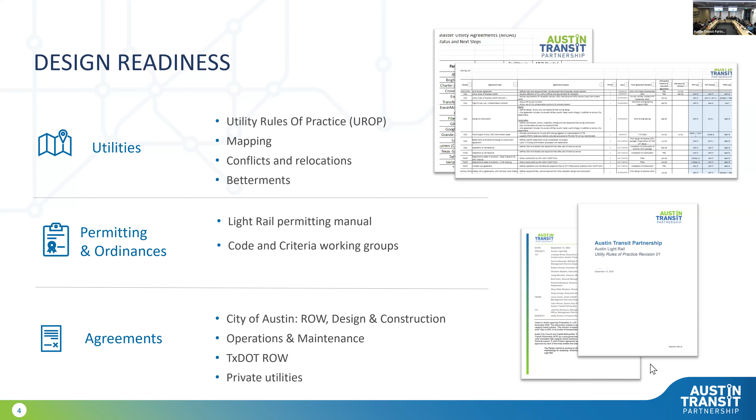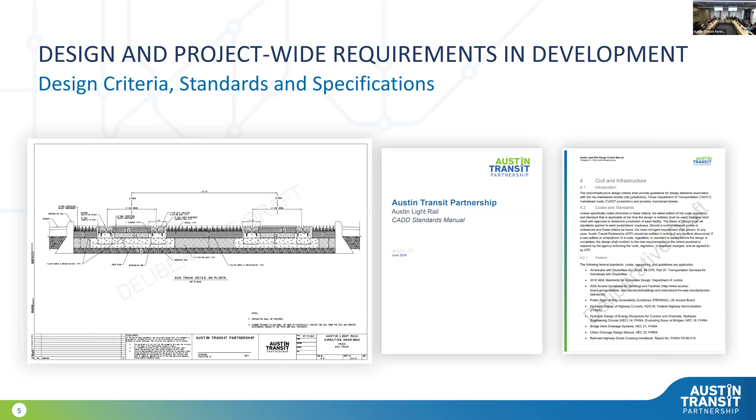Design requirements are an important thing to have in a design project. What they do is help set guardrails for what the design could look like and should look like. We do have various types of requirements in the form of criteria, standards, specifications, and guidelines, with the focus of them being developed as functional requirements so that we still allow innovation from the progressive design builder during final design.

A little more detail on the utility rules of practice. ATP and the city created this set of utility rules to explain how to handle utility conflicts that may be related to the Austin Light Rail project. It offers a clear plan for moving utilities out from under and along the guideway, whether that's to relocate the utility or to leave it in place.

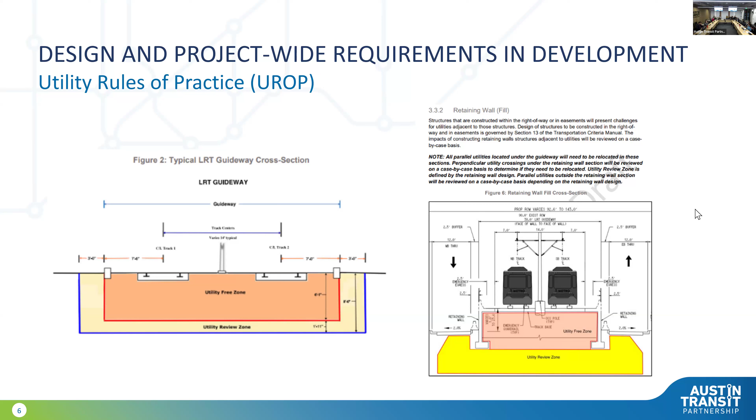For power distribution and rail systems, I want to focus on power distribution being what Austin Energy is providing to the light rail. As part of the light rail system in general, we have what are called traction power substations, and those power the trains, which also power some of the system. But we need to power those substations, and that's what we're asking for from Austin Energy. We've been working with them to make sure they have the capacity to provide and support our project, not only to run the trains, but as a system as a whole.

We do have a campus for our operation and maintenance facility, which is going to be extremely large, as well as station areas that will also require power. The goal for us is to have a reliable and resilient system, and to achieve that, we need some redundancy. So if one traction power goes offline, we have another one that's able to carry that load and keep the system running.

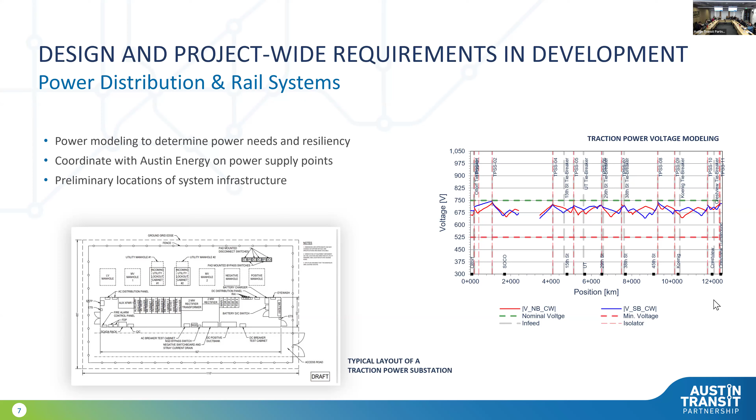Light rail vehicles. This is more of the public-facing part of the system, other than the stations that Lisa and Alex will talk about later. We do have a cross-departmental working group that's working on what our light rail vehicles will look like in the form of technical requirements, with the customer experience in mind as well. There will be opportunity for community input as we continue to advance the planning and procurement of those vehicles.

One thing we are keeping in mind and keeping our ear to the street on is the market. It's rapidly changing in this area, so we are staying involved and kicking off some industry review scheduled for spring of '25.

Thanks, Sophia. I just wanted to zoom out for a second and give a little bit of a frame here. In lots of updates that you're hearing from ATP relating to light rail, you're hearing a lot about NEPA, about project delivery. This is really our chance to show off this work stream that's been a little quieter right now, but it's not like we haven't been busy—so, as you just heard, all of the engineering work and readiness, and then vehicles, which is super exciting.

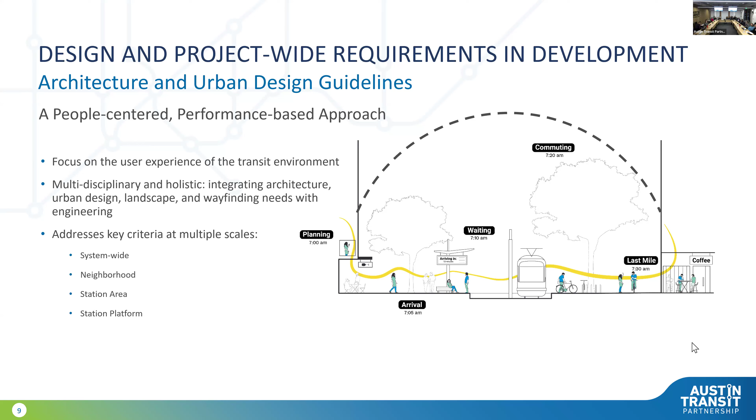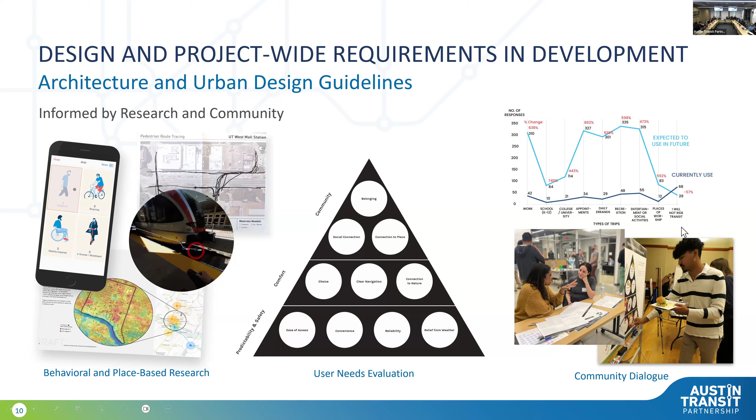The key framing concepts within those architecture and urban design guidelines are here. I'm just going to go through each one.

So, light rail as a greenway. Not just the light rail itself, but because we have the opportunity of rebuilding the alignment for the entire right-of-way, that includes sidewalks, trees, bike lanes, other modes, and the connections of that first and last mile in many cases.

We also have stations anchor neighborhood hubs. These station locations will be sited within neighborhoods in Austin, and we would like them to function as a holistic part of and potential catalyst for the area.

The third one is consistent and site specific. This has a lot to do with both the consistency of the light rail as an entire system, so you recognize it and know what it is as you get there, but also reflecting the importance of that neighborhood and the character and scale of it.

Intuitive and comfortable for everybody. This is not just from a wayfinding perspective and knowing where you are, but also from a thermal comfort, thermal safety perspective, and trying to make it an ease of access when we're using the light rail.

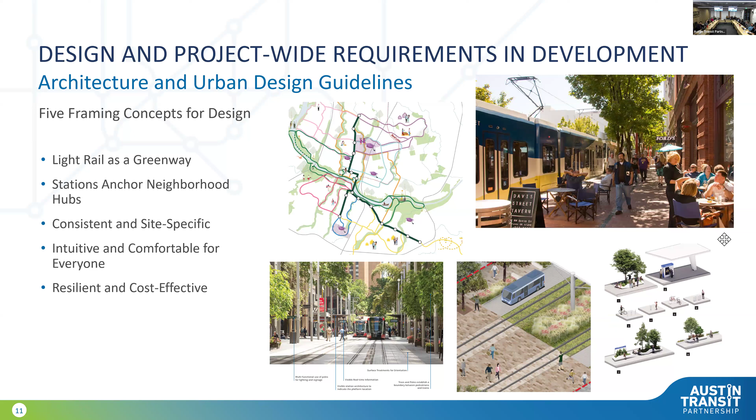The last one is resilient and cost effective. This is not only about constructability, but about the entire life cycle of the system, ensuring that it is maintainable, it will last for a long time, and we are building it for generations.

Aside from the architecture and urban design guidelines, our work group has also developed the sustainability criteria and guidelines. This is a framework for making sure that the entire alignment, the operations and maintenance facility, and all the program within that meets some standard requirements when it comes to sustainability.

This means we have crosswalked those typologies. When you think of all the elements within the light rail, it's not just the civil portions, the rail itself, it's also the stations with platforms, the operations and maintenance facility, the park and rides, and everything that comes along with that. We've crosswalked those with third-party rating systems, including Austin Energy Green Buildings Rating System, LEED, Sites, Envision, and ParkSmart, to create a framework that is a level set across all of those typologies, asking for common data sets from our teams as they go through design and construction. This means tracking things important to us, like water use, energy use, or carbon in materials. This provides a flexible framework and toolkit for the next phases of design and our progressive design builder.

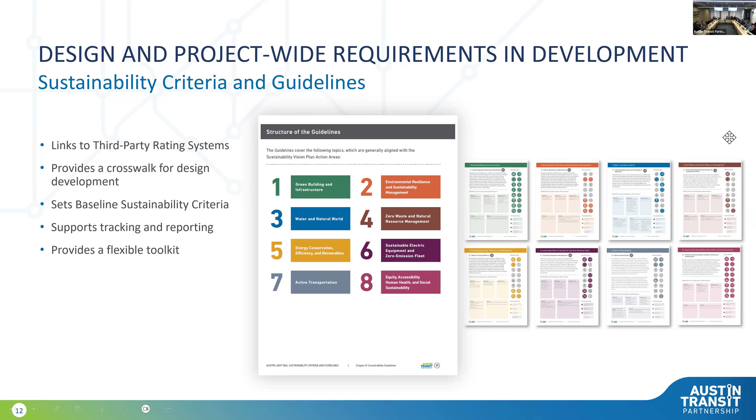And with that, I'll turn it over to Alex to talk about some of the other work streams. So part of the urban design realm is also the back of curb, and really understanding what is the right configuration for a lot of the segments along the corridor.

Understanding the back of curb means sidewalk, bike lanes, street furniture, and what is the right configuration for different segments, different neighborhoods, different zones. So working with the city, we went through this analysis of the different segments and what is the priority for these segments.

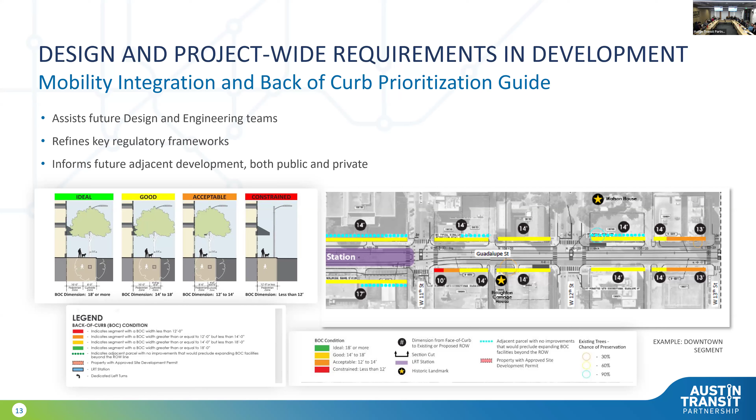And with that, I'll pass it to Alvin.

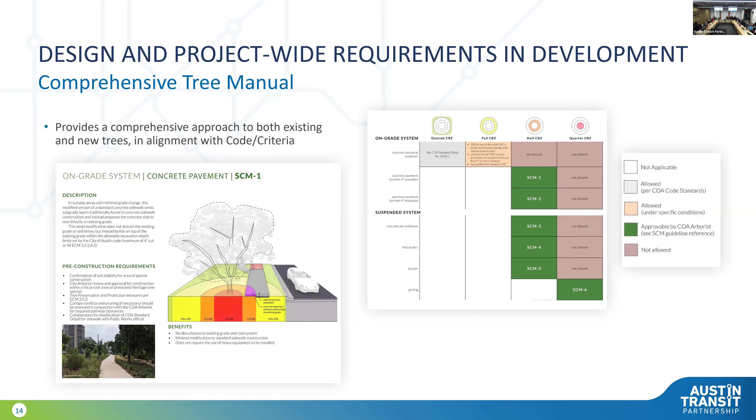So what does 2025 look like going forward? A couple things we're trying to get through: environmental clearance, meaning getting through the DEIS and ultimately the FEIS. We're also trying to onboard a delivery partner - first part of next year we'll get a new delivery partner. For those who don't know, that's a consultant that helps us with the administration of the project going forward, from the design side through construction and setting up operations and maintenance.

Preliminary engineering is where we are right now, trying to develop the level of design to make sure it's ready for our progressive design builder. We're hoping to get most of that work done by spring of this year, so it's prepared for the progressive design build later on.

Sophia mentioned the third-party agreements. Those are critical for us right now because they're going to impact a lot. We need to make sure all the utility companies, as an example, know exactly what they're doing, and that our partners understand their relationships and our relationships in regards to delivering the project. We're working to make sure all of those things are done.

But the real goal is to get to construction. We're working on permitting and ordinance amendments, hoping we can get to a place where when the progressive design builder comes on, they have all the tools they need to seamlessly get permits and do everything they need to get into construction, so we don't get delayed and it doesn't cost us in the long run.